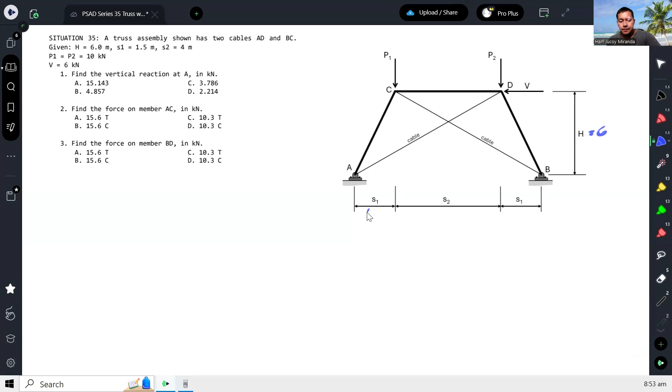In this video, let's discuss a problem similar to our board exam. A truss assembly has two cables, AD and BC. Given H is 6, S1 is 1.5, and S2 is 4 meters. We are also given loads P1 and P2, both equal to 10, and a horizontal force of 6 kilonewtons. First question: find the vertical reaction at A, then find the force on member AC, and find the force on member BD.

Since we know that members AD and BC are cables, we have to remember that a cable can only carry tension. So if a particular cable will carry compression, then the value of the force acting on that cable will become zero. That's the idea.

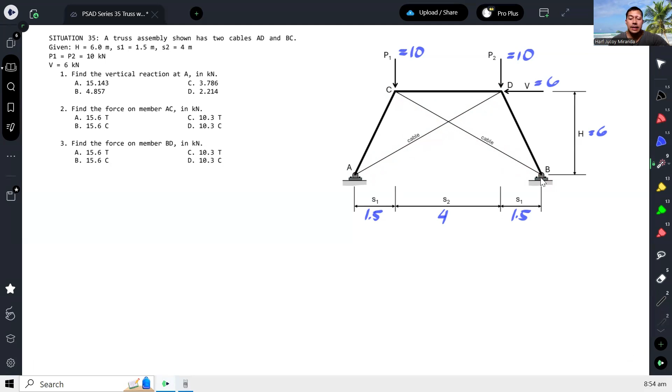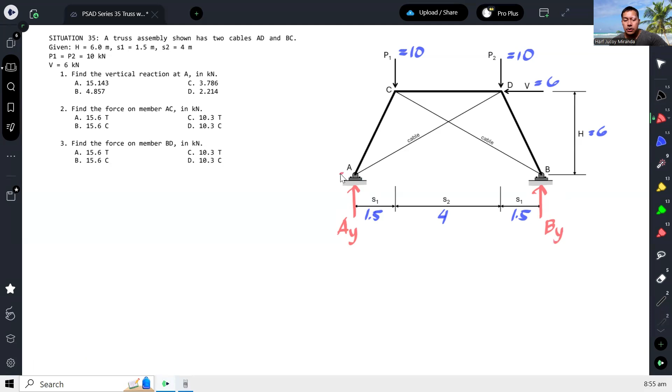Let's answer the vertical reaction at A first. To compute the vertical reaction at A, we have vertical reaction AY and also vertical reaction BY. Because the horizontal load applied on the structure is to the left, we can safely assume that the forces acting on the horizontal supports should be to the right, since that's what's needed to counter it. So the horizontal reactions at A and B will be to the right.

To solve for AY, we will take summation of moment at B equal to 0, assuming counterclockwise to be positive. Let's start with this 10. Its moment arm is this: 4 plus 1.5, that's 5.5. The rotation will be counterclockwise, so positive.

Next is this other 10. Its moment arm is 1.5, and its rotation is counterclockwise. Then for this one, the moment arm is this, and the rotation is also counterclockwise. Lastly, we have 6, and its moment arm is also 6, with a counterclockwise rotation.

AY, AX, and BX pass through the point of rotation, so they have no moment. The same is true for BY. So the only one with rotation is this AY, which is clockwise. The moment arm for AY is 7, because 1.5 plus 4 plus 1.5 gives us a total of 7. Therefore, we can solve for AY.

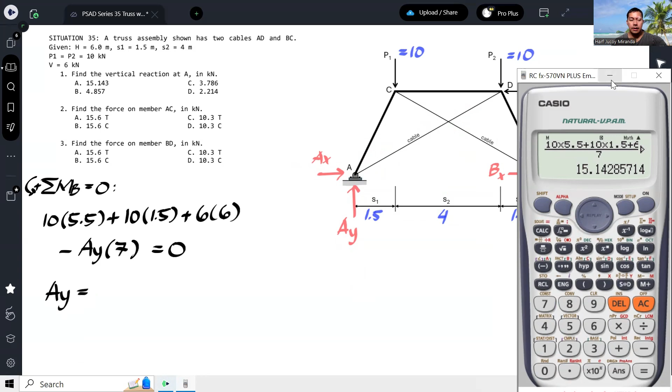That gives us 10 times 5.5 plus 10 times 1.5 plus 6 times 6, all over 7. This gives us 15.143 kilonewtons. So for number 1, the answer would be letter A.

Next, let's solve for the force in member AC. We isolate this part. Here we can apply method of section — we can cut this and isolate the portion on the left. Or another way is we could apply method of joints, analyzing at this joint or that joint.

What I would do first is analyze which of these cables will be under tension and which will be under compression, because based on the configuration of the truss, it's possible that one is under tension and the other under compression. This means the cable under compression will now be a zero force member, because being a cable, it cannot carry compression.

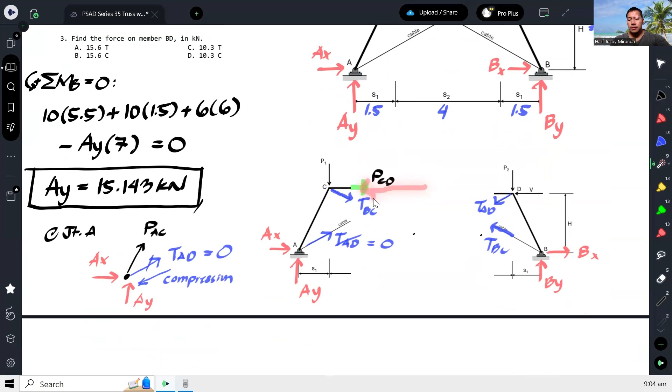So in short, kapag inanalyze natin yung magiging itsura ng curve nito, so bali parang ganito. So dahil dun sa horizontal force, gaganto siya. Tapos dahil dun sa P, parang gaganto. Parang gaganyan.

Na kung saan yung cable na to, mababata papunta doon. Kasi itong cable na to, malulusen. Kaya ang under compression ito, tapos yung kabilang side is magiging under tension. Okay, so that means that BC will be definitely under tension while AD will be under compression. So isa-set na natin na 0 yun.

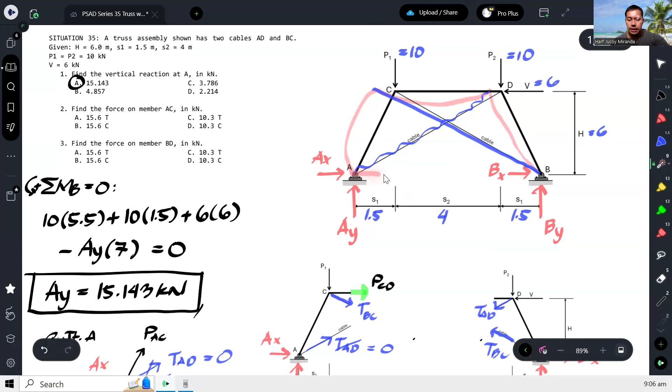Okay, so with that said, we can actually go ahead and proceed with this particular joint A. So sa joint A, i-redraw ko na lang. So ito yung PAC, tapos ito yung AY na na-compute na natin, and then ito yung AX. Okay, and then we can define the slope of this. So ang slope nito ay 1.5 horizontal tapos 6 vertical.

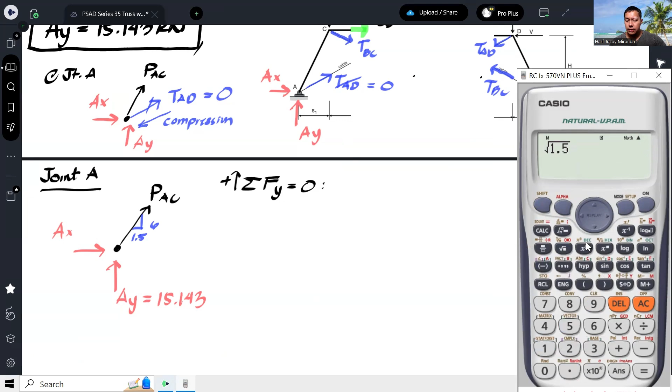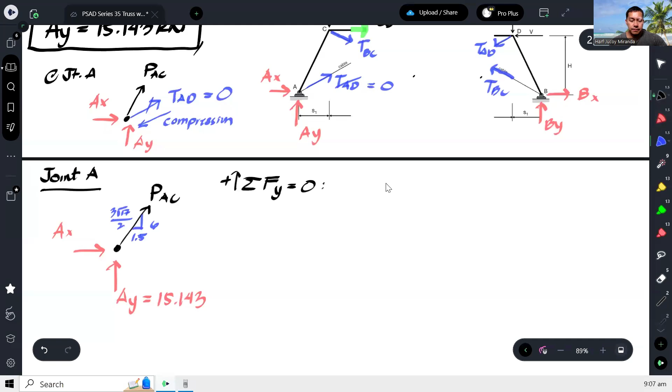Okay, so taking summation of forces, let's start with y is equal to 0. Assuming upward positive, we will have, kunin natin yung hypotenuse nitong 6 and store natin to: square root of 1.5 squared plus 6 squared, so 3 square root of 17 over 2. Okay, so we will have PAC times 6 over 3 square root of 17 over 2.

Upward, and then yung AY natin is upward, okay, and that is all equal to 0. So as expected, itong PAC na to will be under compression, no? So as you can see here, under compression siya. Okay, so therefore, that would be negative, pag i-transpose sa kabila.

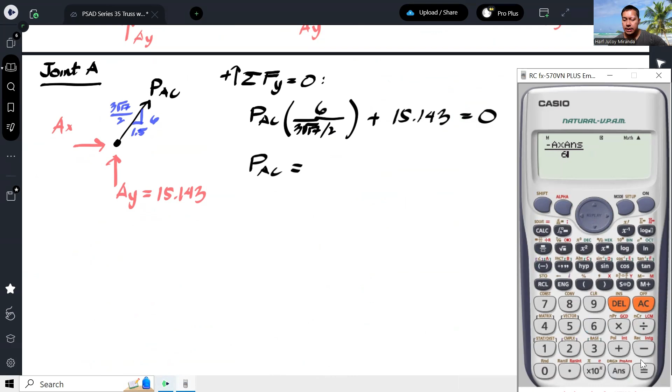Cross multiply yung slope over 6. So that will give us negative 15.609, or that is 15.609 kilonewton under compression.

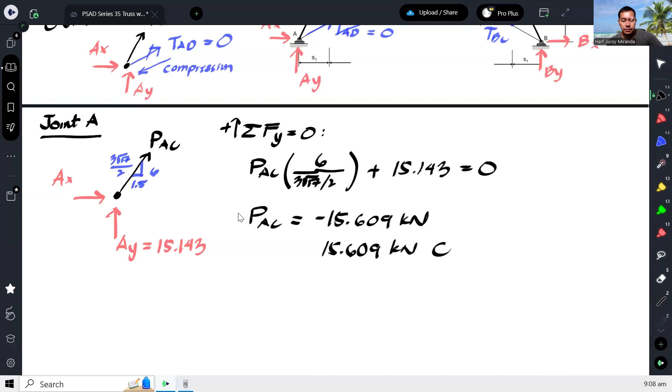And for number 2, our answer would be letter B. Next, find the force in member BD. Okay, so for member BD, let's take advantage na wala na itong member na to. Okay, so dahil wala na yung member na yan, we can just go ahead and analyze joint D. So meron tayong member dito, PCD.

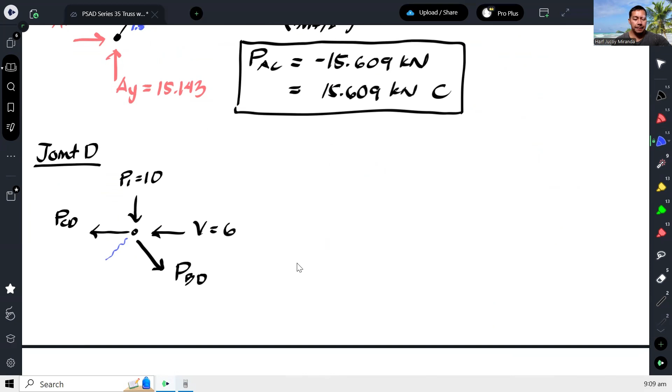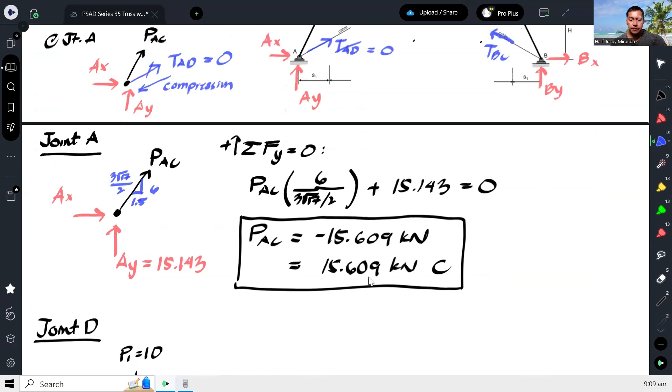Meron ditong P1 na 10. Meron ditong V na 6. Tapos ito ngayon yung PBD. Okay, and then yung nandito, wala na, ano na siya eh, compression na siya eh. Okay, so ang slope nito, ganun pa rin, 1.5 is to 6, tapos ito ay 3 square root of 17 over 2.

So that is all for this joint. And then from that joint, let's take summation of forces. Anong maganda? Vertical na lang para makompute na kagad natin yung kailangan natin na BD. So we will have downward yung 10, tapos downward din yung PBD na vertical component which is 6 over 3 square root of 17 over 2.

And from here, we can solve for PBD. As you can see, magne-negative ulit ito, ibig sabihin, under compression din siya. So that gives us negative 10.308, or 10.308 kilonewtons under compression. So compression din siya.

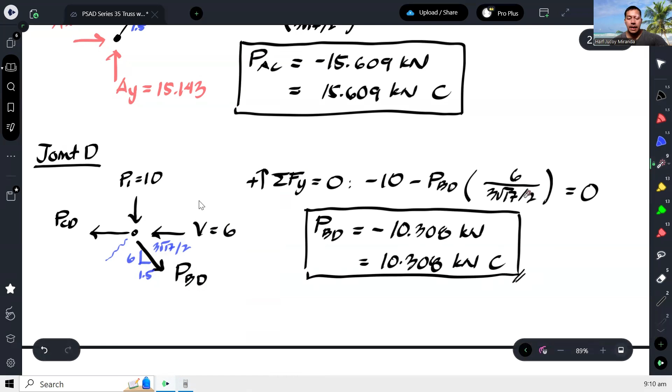Okay, but if you think about it, bakit magkaiba sila? If you would compare the values, mas malaki ang pagiging compression ng PAC kaysa kay PBD. Bakit kaya? Dahil doon sa in-apply mo na force na 6. Yung 6 kasi na yan will somewhat produce tension dito sa member na to. Pero it turns out na mas malaki pa rin yung effect nito kaya overall naging compression pa rin siya. Okay, so actually ito compression din ito eh, compression din yan, pag sinolve mo, magne-negative din ito.

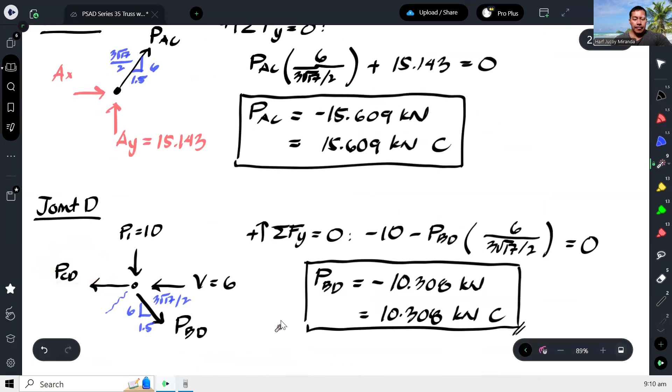Okay, but for number 3, our answer would be 10.3 compression. Alright, and that's how we solve this particular question.